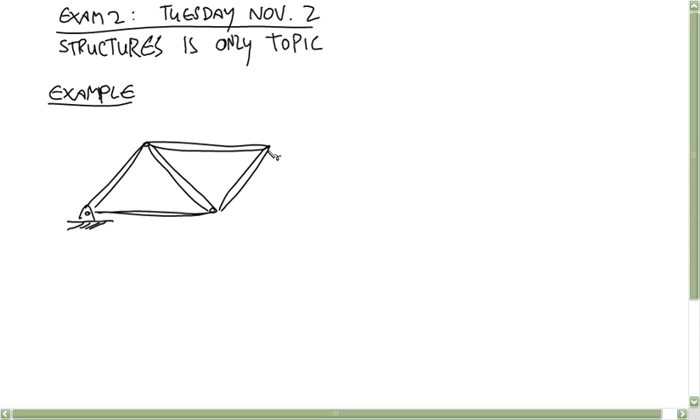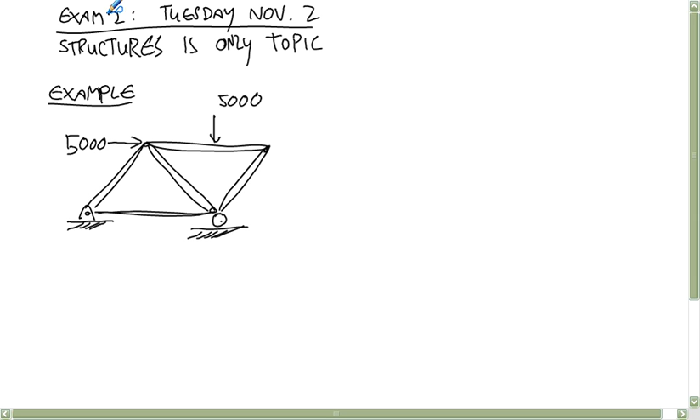And there's a 5,000 Newton force applied at this pin, 5,000, and a 5,000 Newton force down at the midpoint of this member. And let's number the members 1, 2, 3, 4, 5, and then the joints A, B, C, and D. And each member is 1 meter long, so these are all equilateral triangles. And the problem is to calculate the external loads on each member.

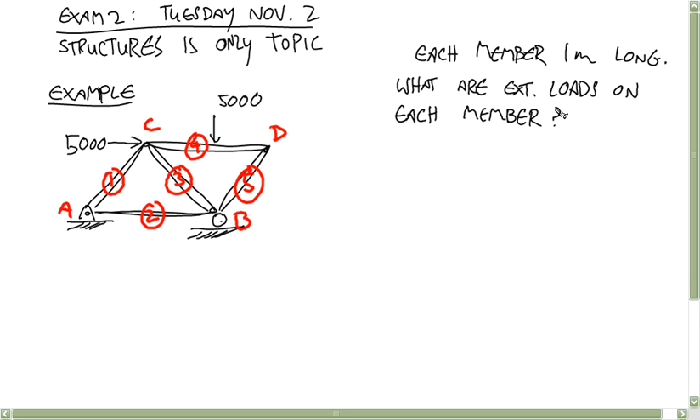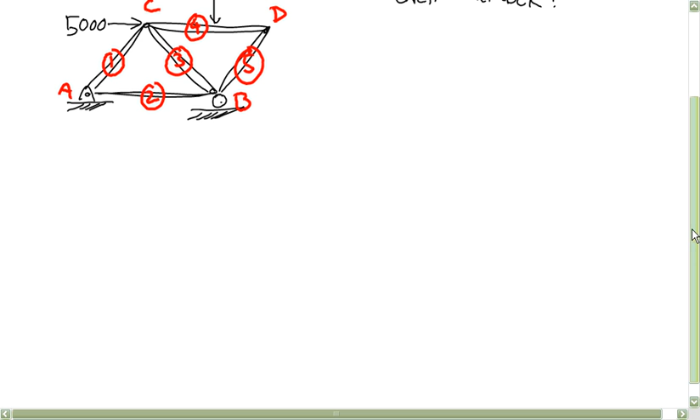Okay, so the first step of this problem is... Isolate the whole thing. Yep. If there's no mass, right? Right, we're going to neglect gravity on this. And after the exam, I'll talk a little bit about how to treat it. So if we had weight on all these, it would be easy to calculate the external loads. Things would get a little weird though when we went to calculate the internal loads on each member.

Can you think why that would be? What would make that complicated? Because we've done internal loads. It's a distributed load, and what's weird about the distributed load? Because we've done internal loads with distributed loads. Okay, what's weird about it is the distributed load on these diagonal members

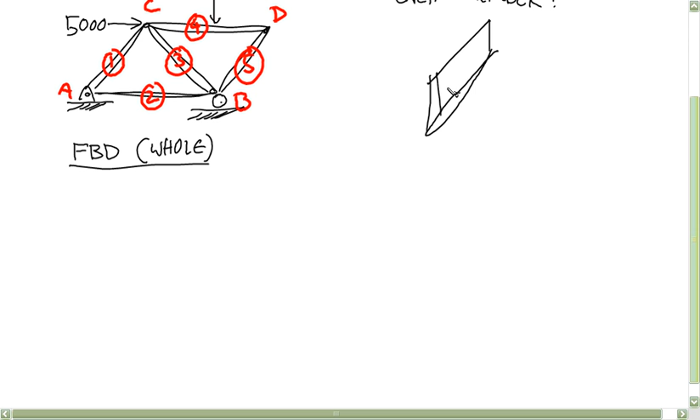are like this, right? So when we do the rotation, we'd get the distributed loads are these vectors. They're not just vertical. You know what I mean? So it's not that hard to deal with, but it's something we haven't done yet. So we'll talk about that after the exam.

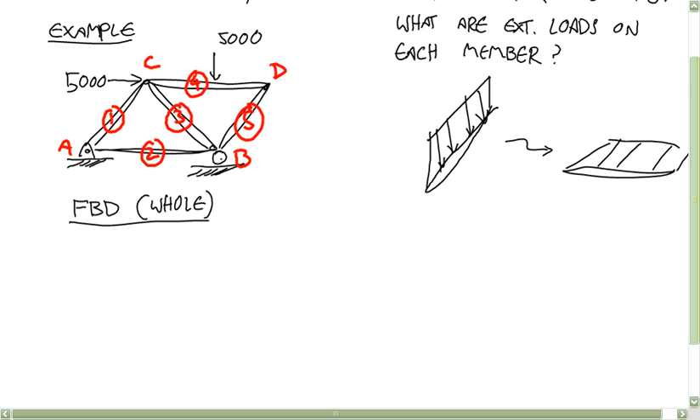Okay, so first we have to isolate the whole structure. So do that, talk to each other as you go, and when you're done, I'll do it up here. And we're just going to go through it member by member. You'll do it, we'll do it up here, and just make sure you're on the same page. Oh yes, thank you. Yeah, let's use the coordinate system like this. Okay.